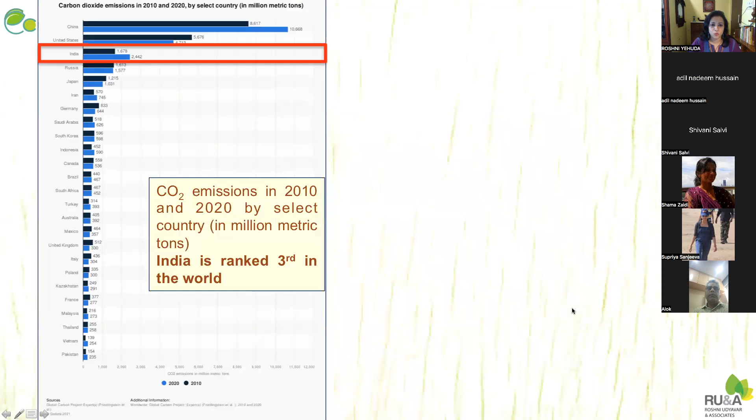So to begin with, why we need green building design. First of all, we are looking at an increased carbon dioxide emission, especially from our country, which is now third in the world in terms of carbon emissions, about 1 to 5 billion metric tons annually.

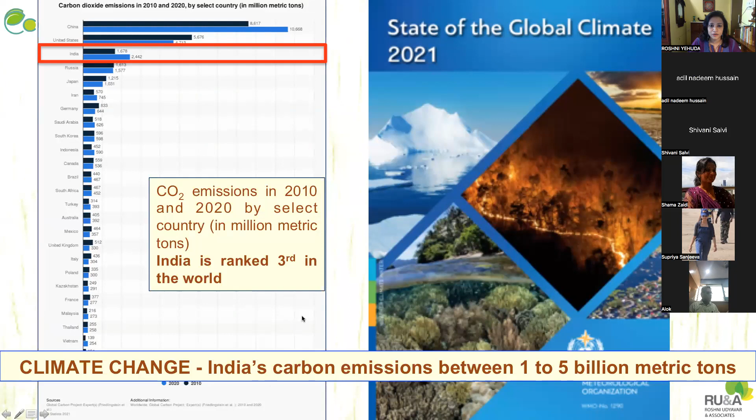And the effects of this are already reported year on year on the state of the global climate by the World Meteorological Organization, which includes a whole range of issues such as extreme weather events, storm surges, sea level rise, sinking of islands, ocean acidification, which is now 26% more than what it was at the time of industrialization, and various other issues, including forest fires and so on. So the effects of increased carbon dioxide emissions are known, and we have seen the effects already happening throughout the world.

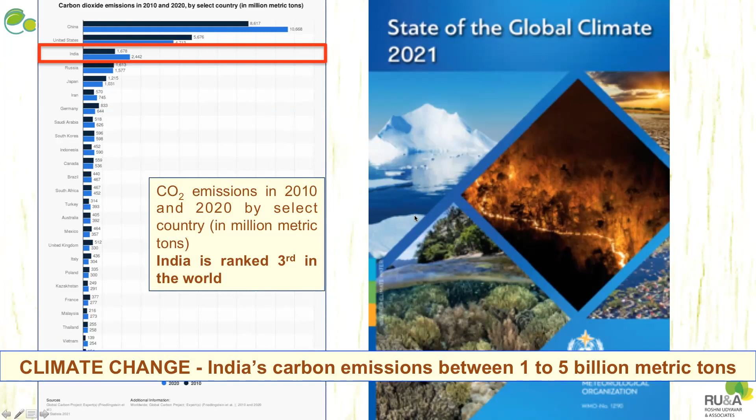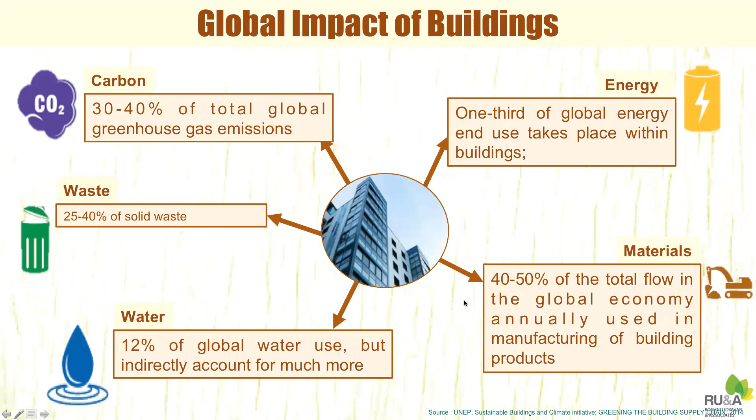When it comes to buildings, what is the role of buildings in these emissions? Almost 40% of the global greenhouse gas emissions is because of buildings. And this includes the energy consumption during the operation and construction of the building, as well as materials that are used. And buildings use water. Almost 12% of global water use is on account of buildings, and that does not account for the water used in the construction or the preparation of the raw materials for buildings, and the solid waste as well that is generated from buildings.

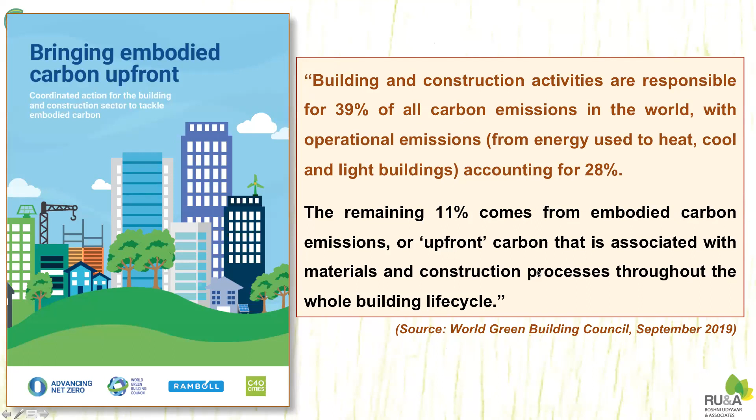Worldwide, the World Green Building Council statistics say that 39% of all carbon emissions in the world are on account of building and construction activities. Of this, 28% alone is on account of heating, cooling, and lighting of buildings. And 11% comes from embodied carbon emissions or upfront carbon, that is in the making of the buildings themselves. So in summary, the built environment is only next to agriculture in its impact on the Earth's ecosystems.

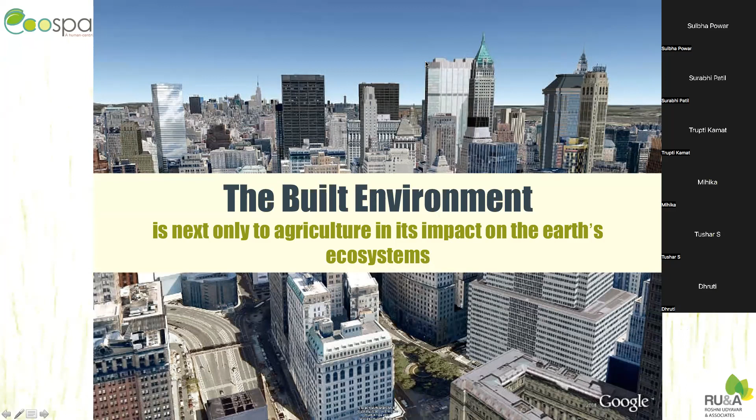So at Roshni Udyavar and Associates and at EcoSpaces, we believe in a human-centric approach to design, which is not just the use of local building materials, reused and recyclable materials, providing visual and thermal comfort to occupants, and making as eco-friendly a building as possible. That is the approach that we have.

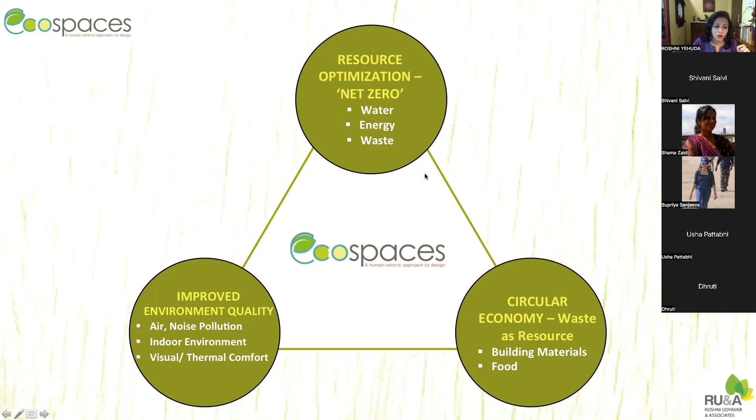And there are three cornerstones to this: resource optimization, that is net zero water, energy, and waste. Circular economy, that is using waste as a resource, so using materials which are reused or recycled or can be reused. And focus on the environment quality, with both indoor as well as outdoor environment quality for the occupants.

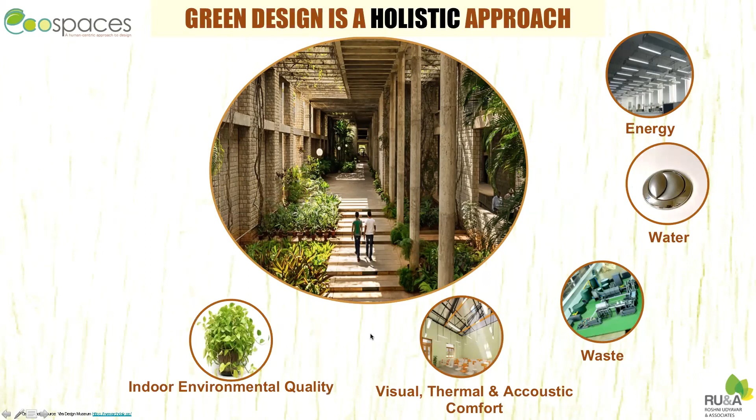So the components of green building design include energy, water, waste, visual, thermal and acoustic comfort, indoor environment quality, vegetation and biodiversity enhancement, and reducing the overall carbon footprint of the building and its occupants. Let's go through each one of them one by one.

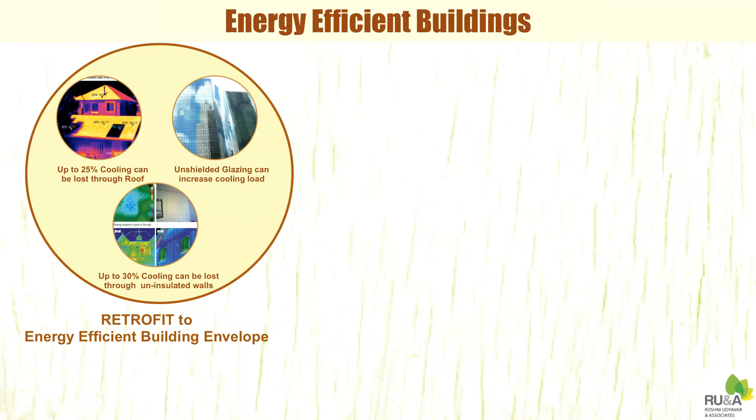The first one is energy efficient building, which is the first component of green building design. This involves design of the building envelope in such a way that the building walls, building roof, glazing, all are energy efficient and providing thermal comfort. So this is the first step for making a building energy efficient. The second is use of efficient equipment. And the last is to additionally add renewable energy, which will make the building nearly zero energy.

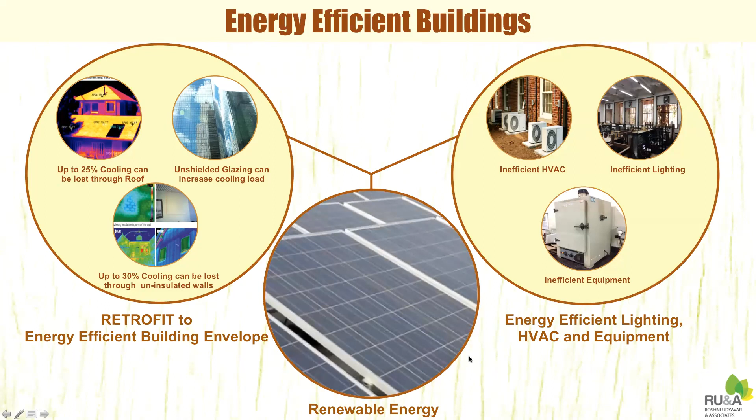So these are the three components that go into energy efficient design. To elaborate a little on what building envelope design is, we analyze the building with respect to its orientation, the site, the form, the materials used on the envelope, and what is the best possible solution. This is an example of a building in Mumbai.

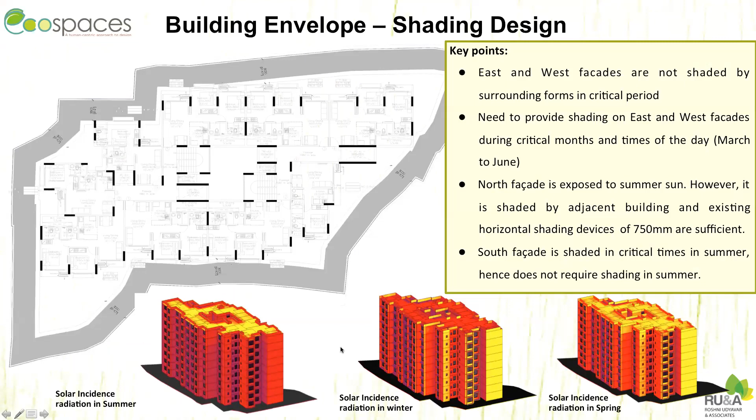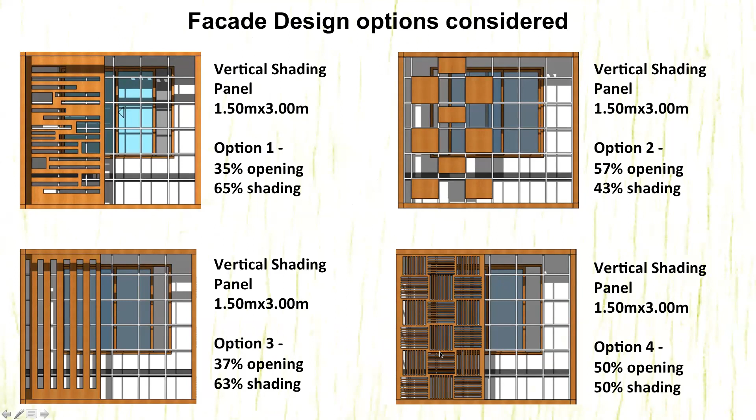And then we came up with various designs for the facade, the eastern facade specifically, in terms of the shading, maximum shading during summer. You can see that there are various options that we came up with, and in terms of aesthetics as well as the material used, we had given various options. So this is an output of how the building can be designed with respect to both climate as well as energy efficiency.

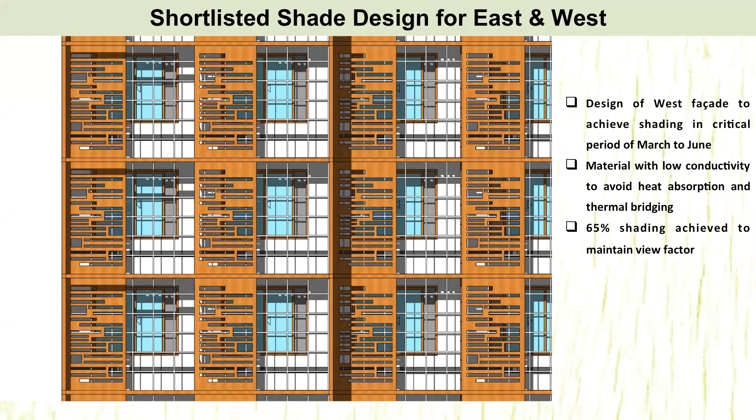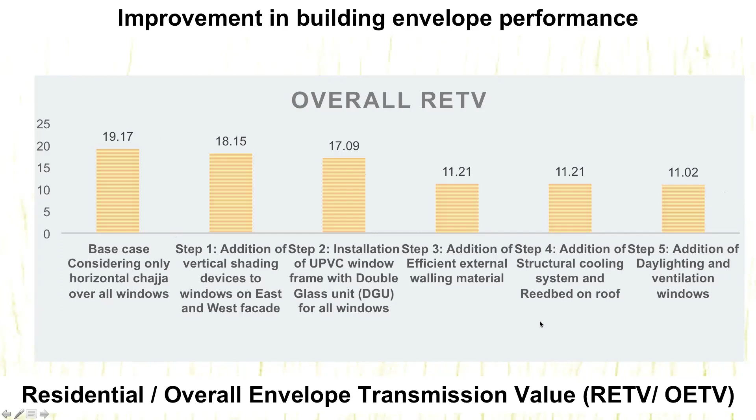Also in envelope design, there is something called the overall or residential envelope transmission value, which calculates how the envelope is affecting the energy consumption of the building. So basically you calculate either manually or using simulation, and you can see that from the base case of 19.17, by using various methods like high performance windows or external walling materials or cooling systems, and using good daylighting and ventilation, you can reduce the overall energy transmission value and make the building more efficient.

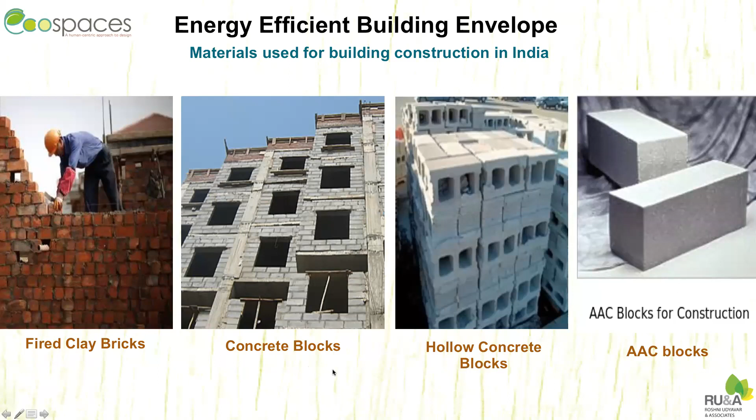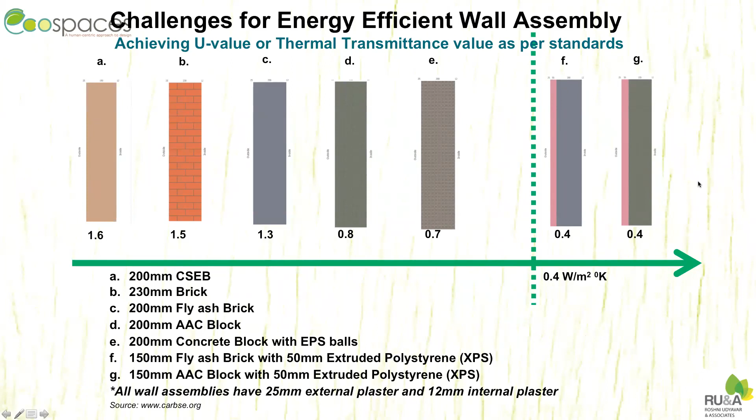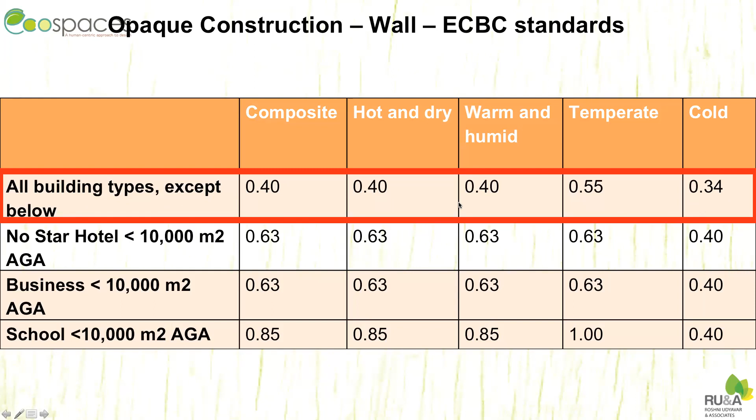But only when you use something like an insulation material are you able to achieve the standards that are given, for example, under the ECBC. So in order to make your building efficient, you need to do various things, and this is part of building envelope design. This shows the standard. You can see 0.4 for all building types under the Energy Conservation Building Code. 0.4 is the standard transmission value for buildings' external walls.

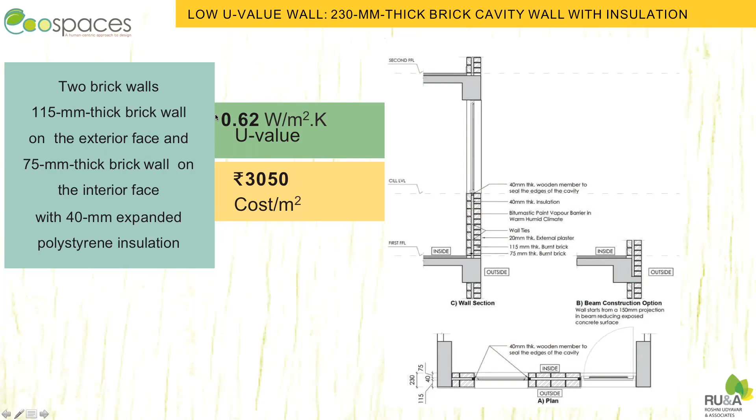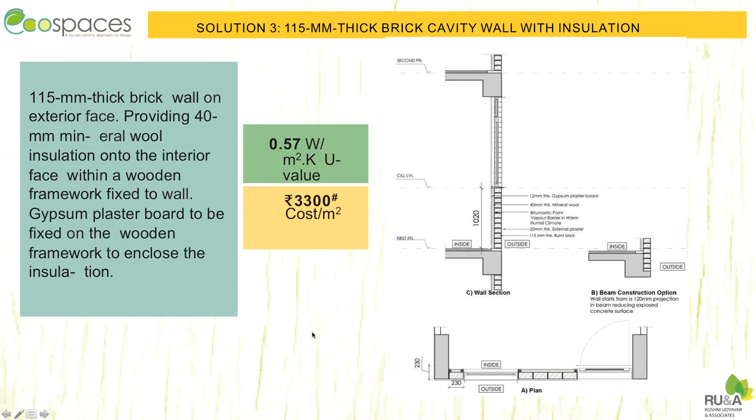And here you can see what combinations are possible. In the earlier case, you saw that the efficient material is something like AAC with insulation. However, you can also have a 115 mm thick brick wall along with a 75 mm thick brick wall and insulation, and get a comparatively good U value, and the cost is also much less. So these are the various options that can be worked out depending upon the site and the material availability. Similar to that is also the roof.

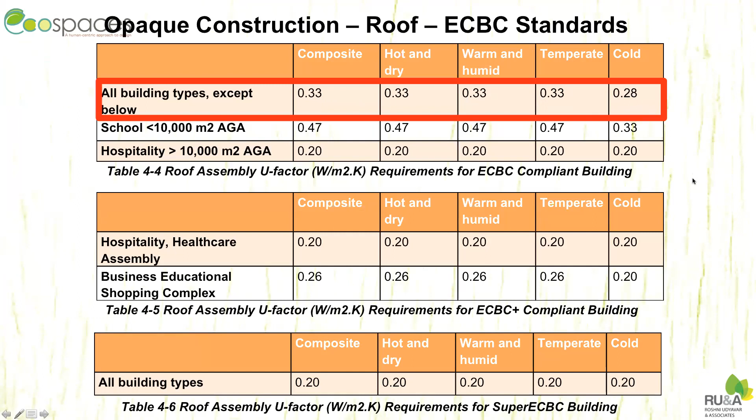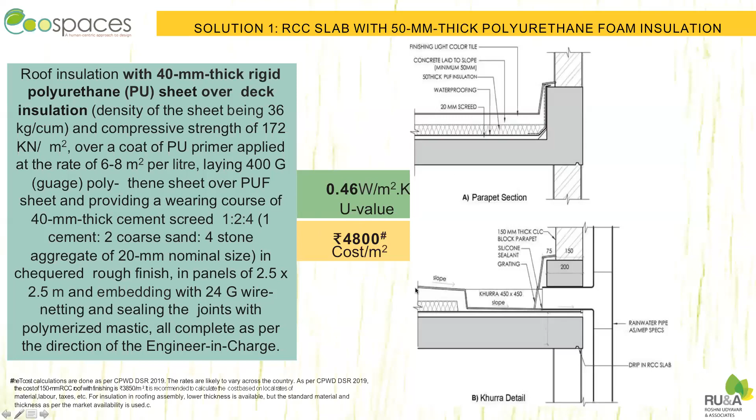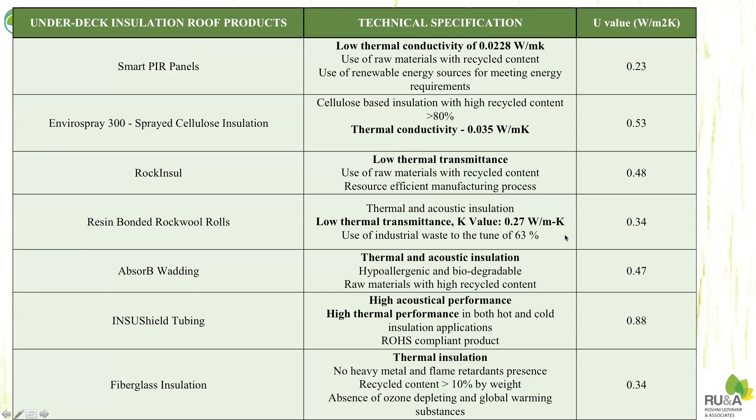So you can see 0.33 is approximately the U value for roof that is required under the Energy Conservation Building Code. This is not 0.33, but even here an insulation has been used, and this is the kind of value we can achieve. And various other things can also be done. Here you can see a list of various types of underdeck insulation products and their comparative U values, and some of them are able to achieve the U values required as per the standards.

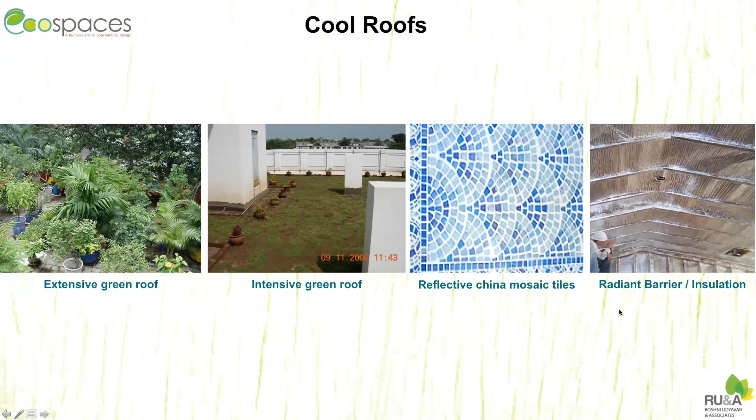Also, one can go for an extensive or an intensive green roof, or use high albedo materials like China mosaic tiles or SRI tiles, and underdeck insulation, or even a radiant barrier such as what is shown over here. Or you can have other combinations, other design inputs like filler slabs or funicular roofs, and so on.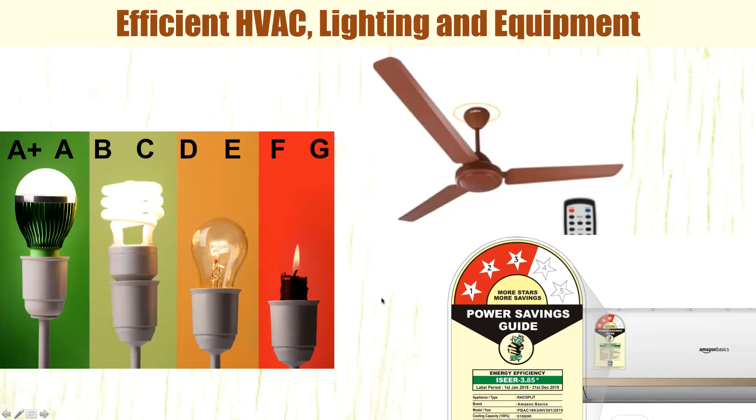The next component of energy efficient design is efficient equipment, which is not very difficult, but what kind of spaces should have what kind of lighting, what should be the lighting power density, and what kind of equipment and HVAC design should be used is also something that is required in green building design.

Here's an example, the energy performance index. It's an index which gives you a benchmark for the energy performance of a building. And here, this is for a 1 BHK apartment. You can see that by using various efficient equipment such as geysers or air conditioners or ceiling fans, slowly from 2014 to 2018, the EPI has come down.

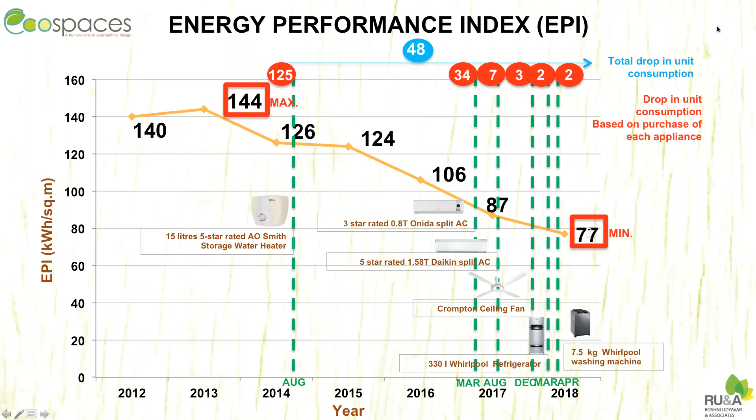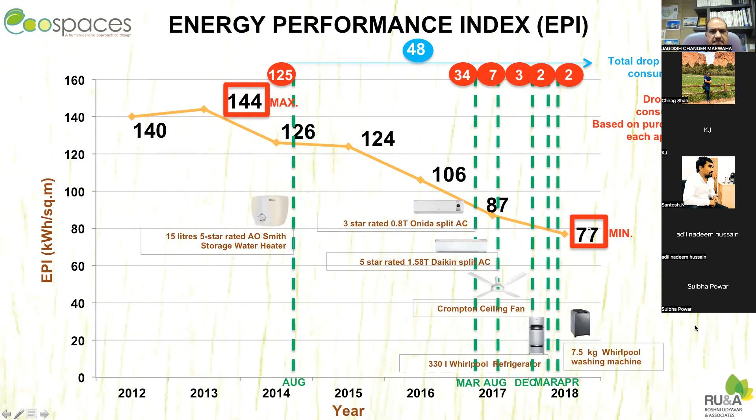The next step is making the building a nearly zero energy building. So once you have done the envelope and the equipment, then you can have renewable energy in the form of solar panels or wind energy or bioenergy or biomass. And you can further reduce the energy consumption of the building by using a decentralized renewable energy source within or near the site.

An example of that is the Paryavaran Bhavan in New Delhi, which is not only one of India's first net zero energy buildings, but it's a net positive building, which means that it gives more energy to the grid than is actually required by the building. And this is on account of the very good design in terms of daylighting, as well as the huge number of solar panels, about 930 kilowatt peak, that have been put onto the roof of this building, which takes care of its energy requirements.

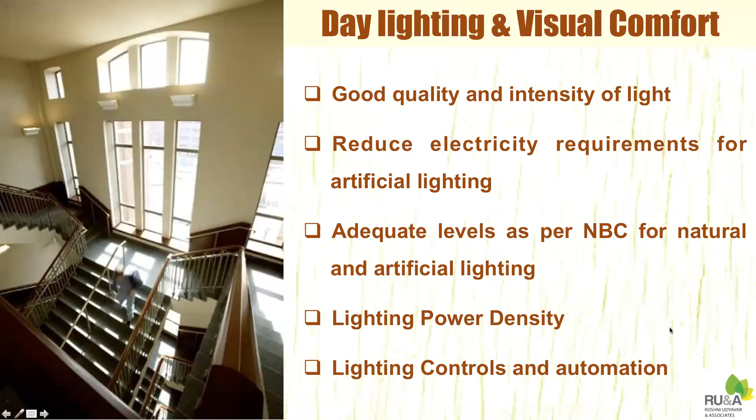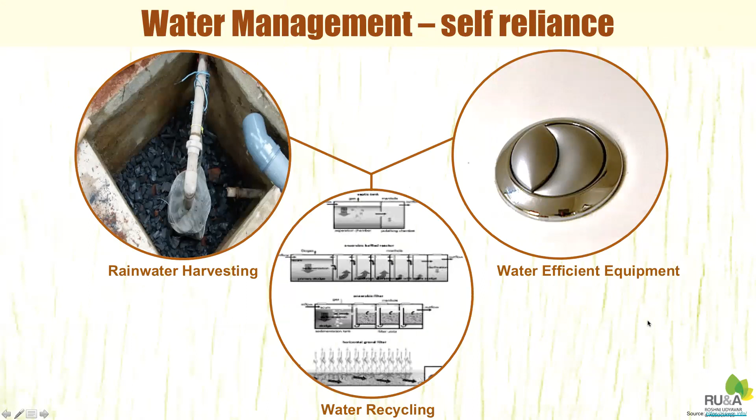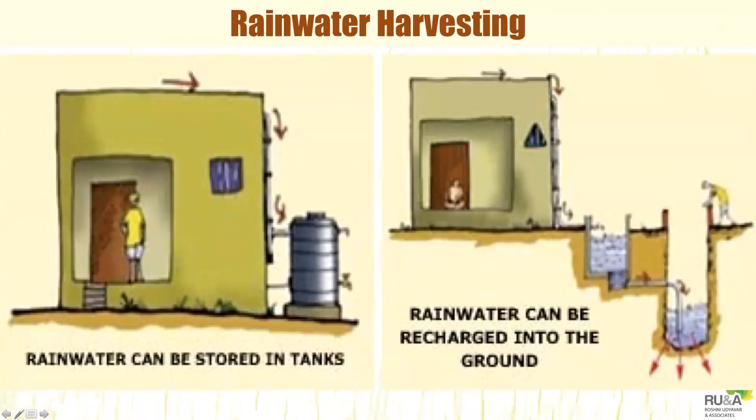In addition to that, providing good daylighting, that is visual comfort, is also part of green building design. The next thing is water management, which involves 3 steps, that is harvesting the rainwater on the site, using water efficient equipment, and wastewater treatment. In rainwater harvesting, of course, you can do 2 things. One is storage of the rainwater, or you can put the rainwater in the ground by groundwater recharge, if that is permissible in that specific area.

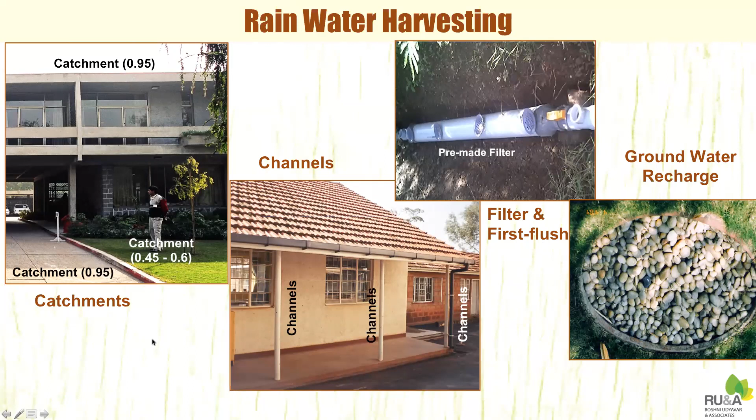This involves identifying the catchments, because each catchment has a different runoff potential, identifying what kind of channels can be used, the filters and the first flush device, and finally the groundwater recharge technique, whether it is a trench, a pit, a deep recharge system, or something like that. So every site has a potential for rainwater harvesting. The idea is to use it as much as possible so that there is a minimum amount of runoff from the site, and most of the water goes either down or is used on the site itself. Here are some of the case studies in and around Mumbai that we have done in the past.

Water efficient equipment is the second part of water management, which includes using water efficient equipment such as flow restrictors, pressure reducing valves, low flow rates, sensor based faucets, dual flush systems, using water meters to monitor the usage, and drip irrigation, sprinklers, and so on for the landscape.

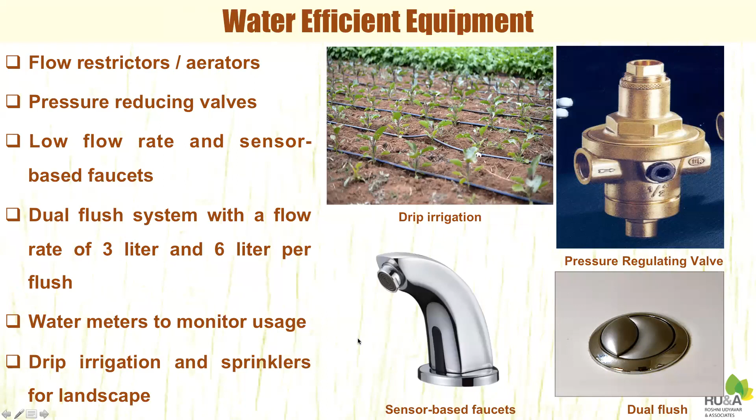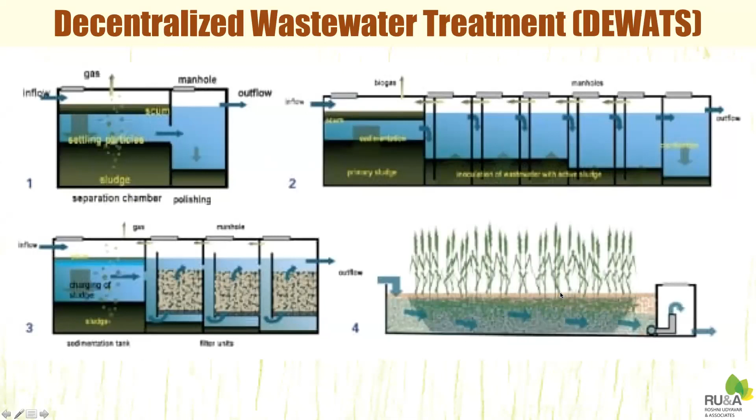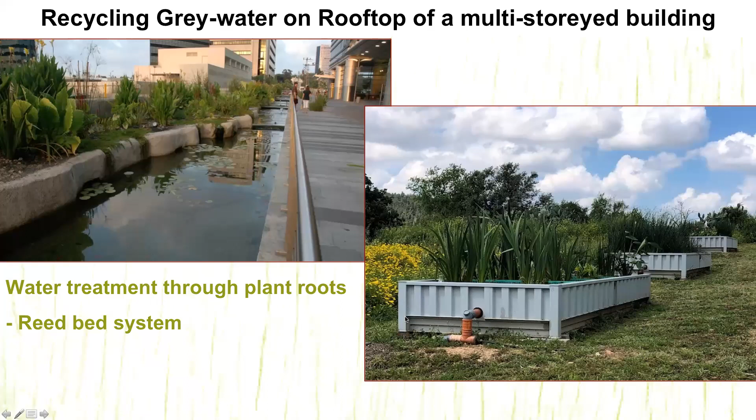Lastly, if you have the space and if you can afford the cost, you can also do decentralized wastewater treatment. We recommend systems which do not use energy and which use plants, and by the reed bed system or the roots themselves, they are able to aerate and treat the water. So this kind of system is more advisable. There are various types of these systems, and there are even modular systems now available which you can install if there is space within your site.

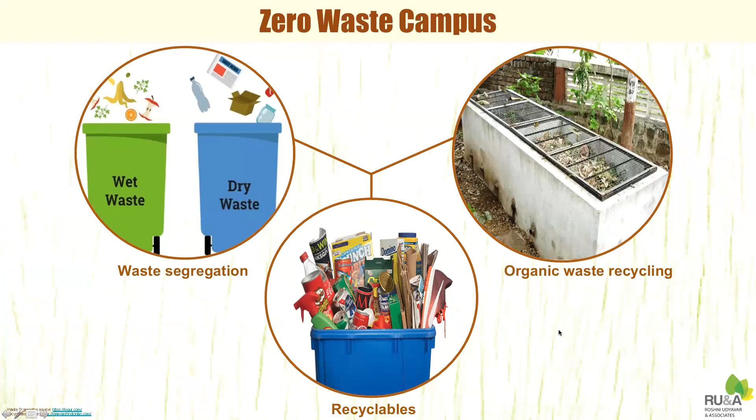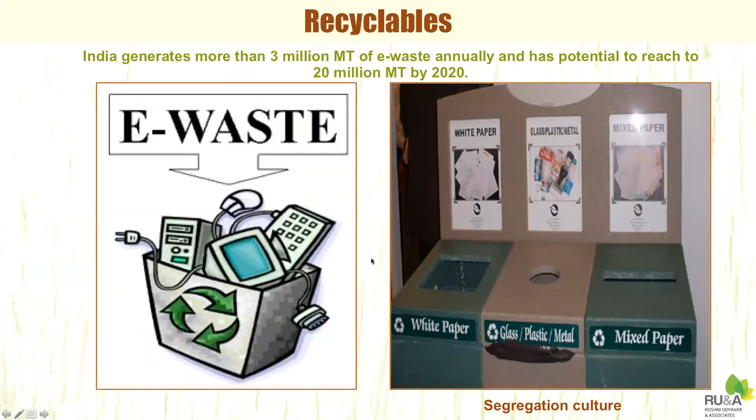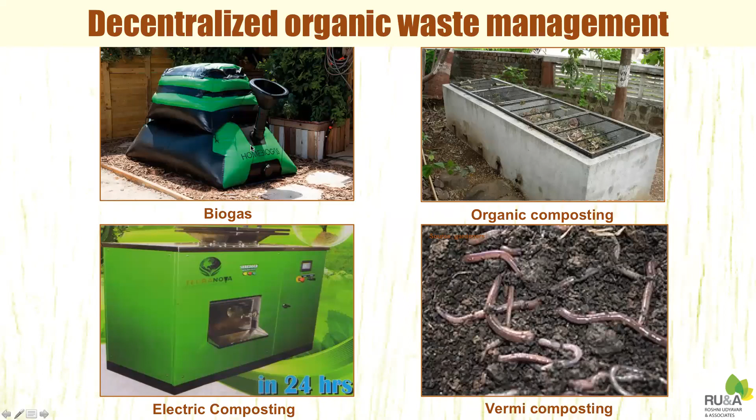The next thing is looking at solid waste. So how we can segregate waste, treat the organic waste on site and give the rest of the recyclables for recycling in some way or the other. So having the segregation, even including e-waste, how it can be treated, or you can have a tie-up with a local company in order to reduce the e-waste. And what kind of system is most appropriate for your site, whether it is biogas or vermicompost, an organic composting system, and so on.

Lastly, we look at indoor environment quality. So you can see that there are various things involved in improving the indoor environment quality, that is removing harmful chemicals, having good ventilation, and plants are one of the ways by which you can do it as well. There are various other techniques, but it basically involves providing good visual and thermal comfort to the occupant.

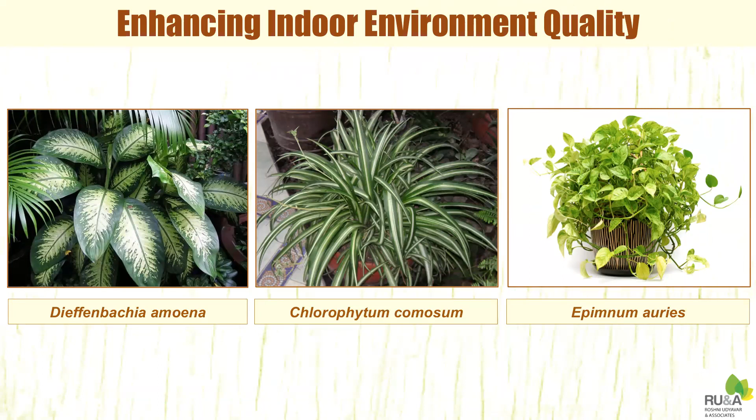Carbon footprint reduction, meaning, for example, if during the construction process you have to remove trees, how to have additional tree plantation there, or how you can transplant the existing trees back onto the site post construction, or you can even have a tree plantation at another place, which is called afforestation. So there are various ways by which you can reduce your carbon footprint. Even the mode of transport: if it's a college or an institution, you can have an electric transportation system, or a cycling system or something like that.

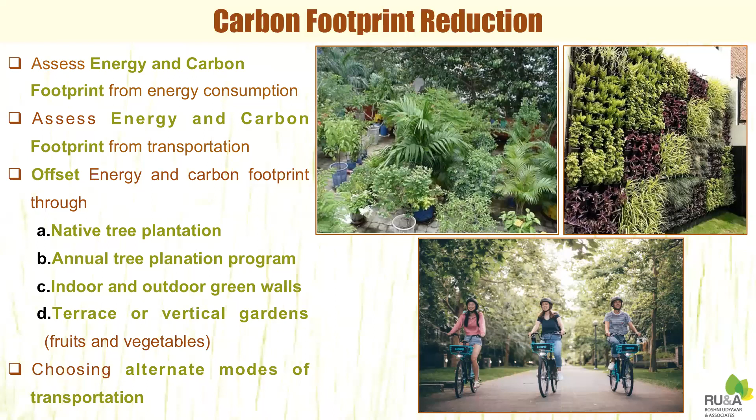Increasing the vegetation and biodiversity. This can be done even in small spaces by having the right mix of various kinds of plants, which also attract various types of fauna and insects, and make the ecology more holistic.

So that's it from me, and now I would hand over to Shivani to start the next part of the presentation, which is on green building certification. So over to you, Shivani.

Is the screen visible? Yes, yes. You can put it on. Yes, thanks.

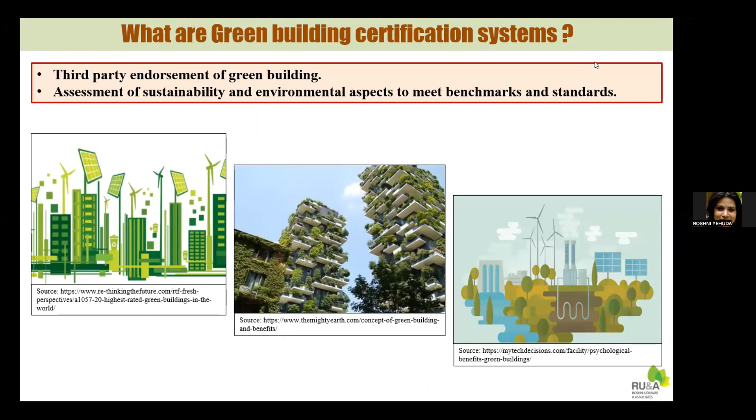The green building certification systems are IGBC. IGBC is Indian Green Building Council. The organization is Confederation of Indian Industry, which is CII IGBC. The type of rating is green new buildings, and the point system is till platinum.

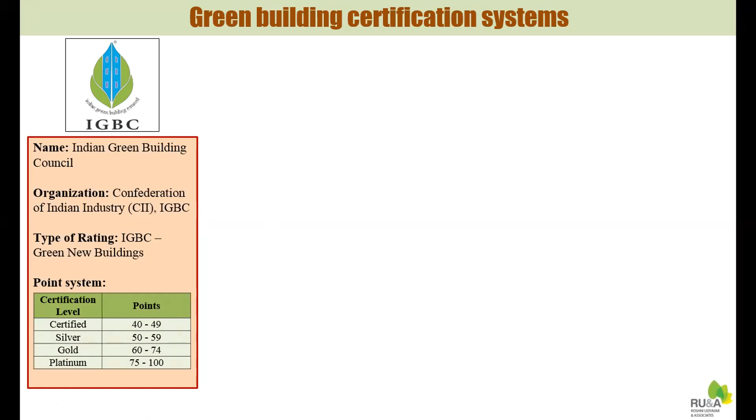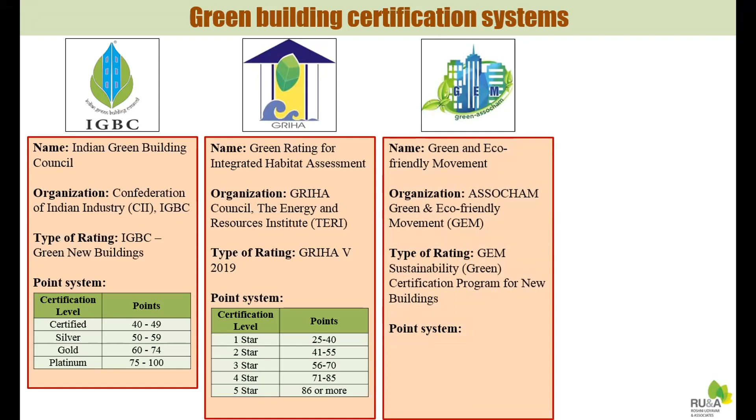GRIHA is a green rating for integrated habitat assessment. The organization is GRIHA Council, and TERI, which is the Energy and Resources Institute. The type of rating is GRIHA version 2019. And the point system is 1 to 5 star. GEM is a green and eco-friendly movement, and the organization is ASSOCHAM GEM. The type of rating is GEM Sustainability Green Certification Program for new building. And the point system is again from 1 to 5.

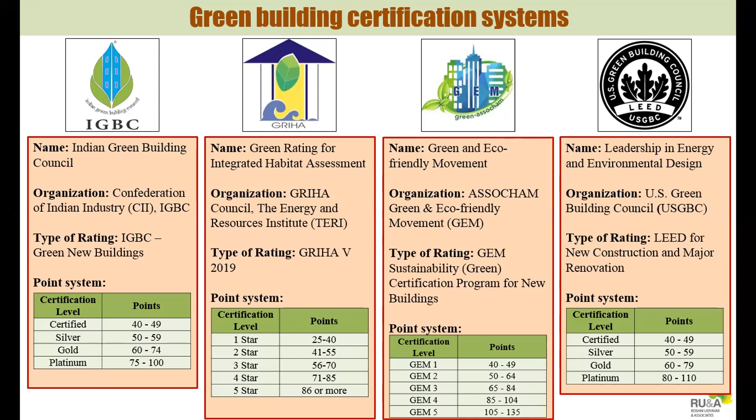LEED is leadership in energy and environmental design. The organization is USGBC, that is the US Green Building Council. And the type of building is new construction and major renovation. The point system is up till platinum. These are the various common certification systems which are basically used in India.

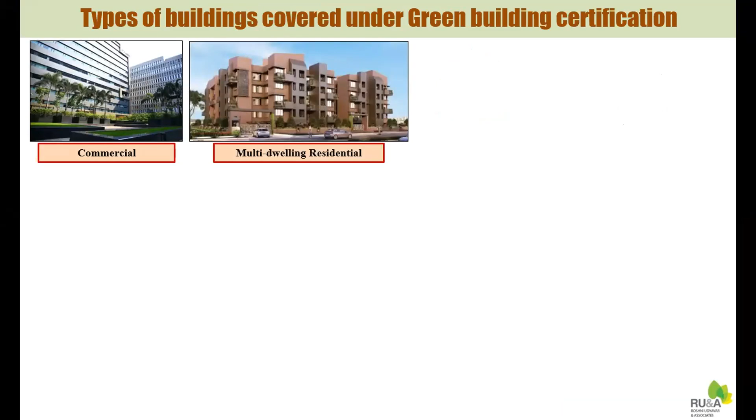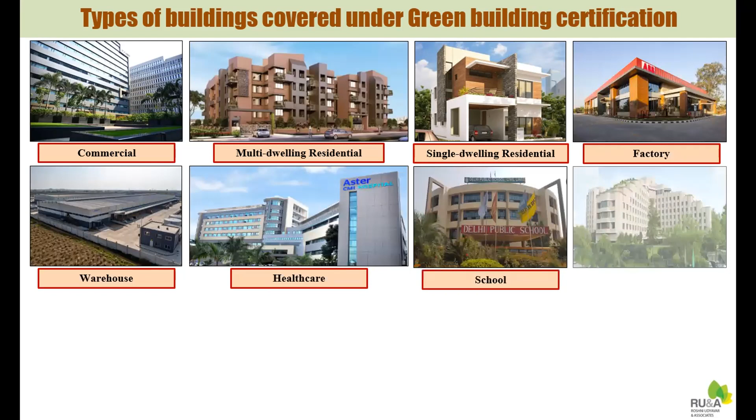The types of buildings that are covered under green building certification are, we'll be looking at some of the major categories. All the major categories are covered under the various green building certification systems. So we start with commercial, multi-dwelling residential, single dwelling residential, factory, warehouses, healthcare, schools, hotels, shopping malls, and green interiors for commercial as well as residential.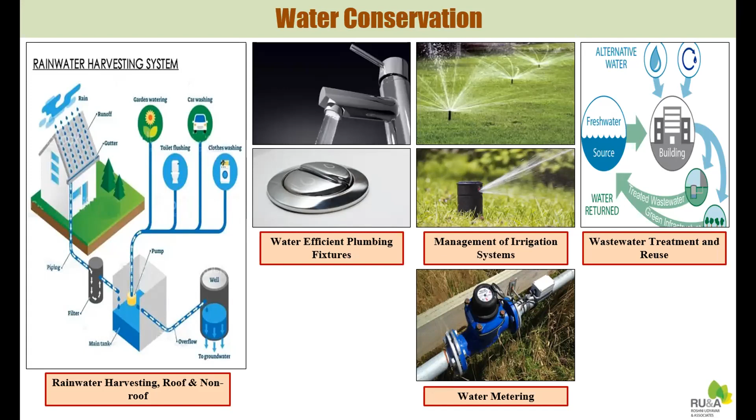Under energy efficiency, some of the credits have been mentioned here. So having R32 refrigerants for HVAC and the air conditioning systems, using solar PV, solar thermal and wind energy, on-site and off-site, having LED lighting fixtures, which are energy efficient, and energy efficient air conditioning systems, BEE rated, 3 to 5-star rated.

You also have to carry out a whole building simulation to understand the building performance, the building envelope performance, and the energy performance. So an energy simulation has to be carried out, which is a major part of this credit. And again, energy metering for the various energy use applications, and a building management system.

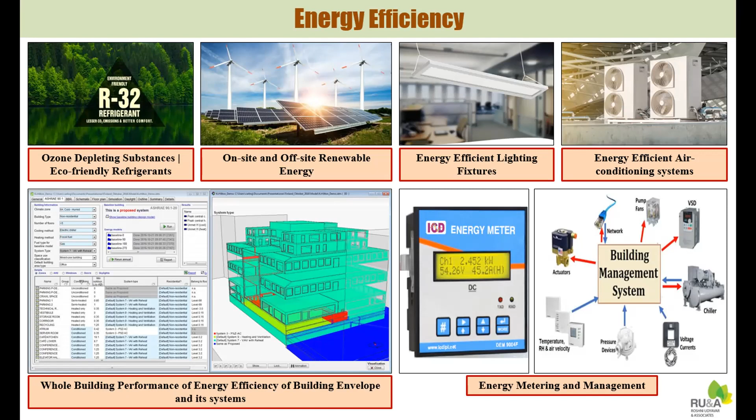Under building materials and resources, some of the credits are mentioned over here. Segregation of dry, wet, organic waste, e-waste, etc. Followed by organic waste management: a provision for an organic waste management system has to be made. Under reuse of salvaged materials, you use the old building materials. So if a building has been brought down, you use some of those materials like the windows, doors, etc. And materials with recycled content include fly ash bricks, recycled concrete blocks, etc.

Local materials are those locally available near the site within around a 400 kilometer radius. Rapidly renewable materials include bamboo and bagasse. And wood-based materials are FSC and PEFC rated wood. Those are to be used. And handling of construction waste is segregating the concrete, bricks, plastic, wood, metal, glass, paint containers, etc. All that waste has to be segregated and reused.

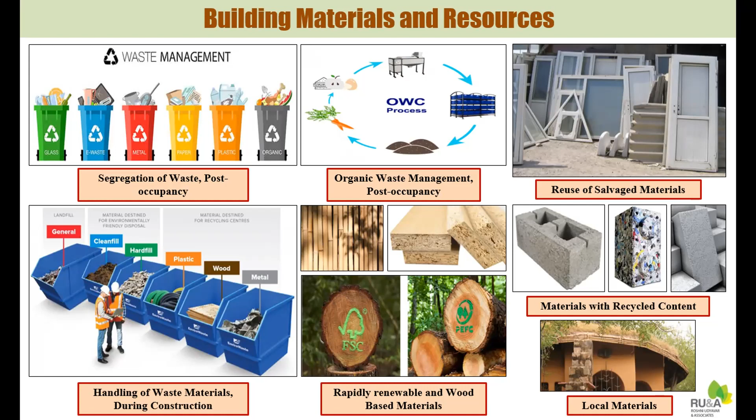Under environmental quality, we have the CO2 monitoring. So CO2 sensors and the monitoring has to be done. Under minimizing indoor and outdoor pollutants, we have the metallic entryway systems to reduce the dust particles from entering the structure. And we have MERV 13 filters for the air conditioning systems, and germicidal UV lamps again for the air conditioning systems.

And then we have low emitting materials, which are paints and adhesives which have a low or zero VOC content. And the carpets should be CRI Green Label Plus rated. And WPC is a wood polymer composite. So these can be used for paneling and for interior use basically.

The indoor air quality management is basically keeping the areas clean and covering the ducts during construction. You cover the ducts so that there's no dust inside, and there are many other criteria also. I've just mentioned two here. And indoor air quality testing is after construction and before occupancy. There is an indoor air quality testing that has to be carried out.

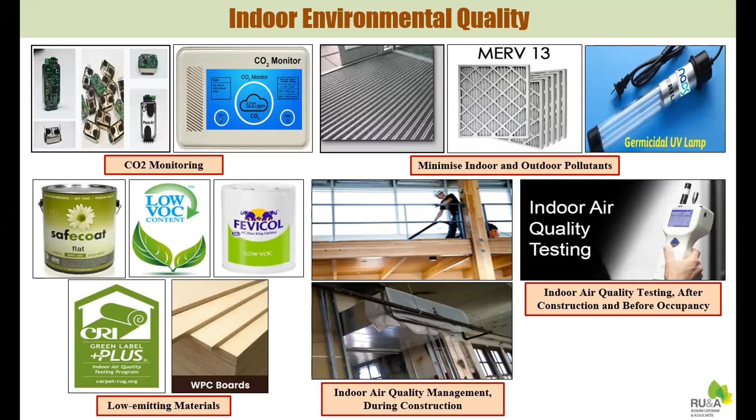Yes, now we'll move on to a tentative process of green building certification, how you go about it. You start with the type of project. So you basically know that first, and then which category, like healthcare, residential, new building, it falls under, followed by the registration procedure, which would take around 6 to 7 days, followed by the green building certification preliminary assessment and green building documentation. That would depend on the stage of the project, so accordingly, the time it would take.

And here what we see is the submission of preliminary documentation for review. It would be reviewed by third-party assessors, which would take around 30 days. After that, there is the final submission and then a site visit. And then you get the final review and award of rating, which would take another 30 days. So this is basically a tentative timeline and process for green building certification.

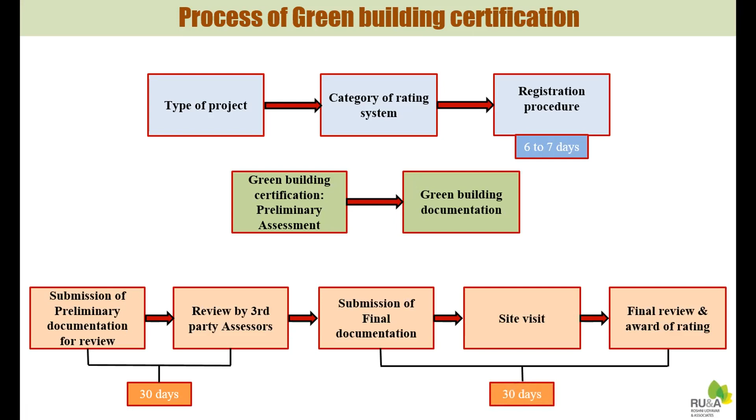The tangible benefits of green building are represented in a graphical format here. Energy savings are in the range of 42%, which would be achieved by having an efficient envelope system, efficient materials, and efficient equipment and appliances. The waste reduction is around 33%, by having an effective waste management plan executed on the site. And water savings is around 25%, which could be achieved by installing water efficient plumbing fixtures and reusing and recycling the waste water which is generated.

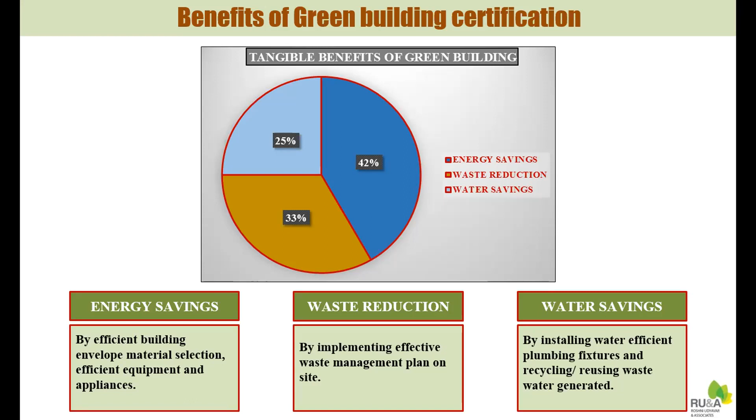The cost of green building is around 8 to 10% more than that of a conventional building. The parameters by which the cost would increase are renewable energy such as solar PV, thermal and wind; passive design, which would be minimum if it is taken into consideration during the design stage itself; wastewater treatment system; energy efficient equipment; and solid waste management system.

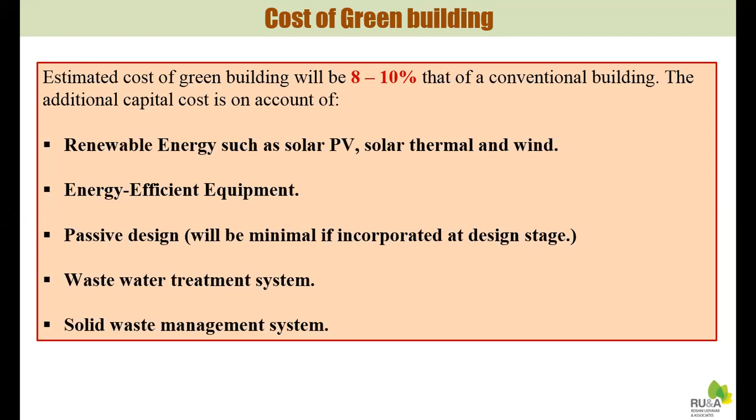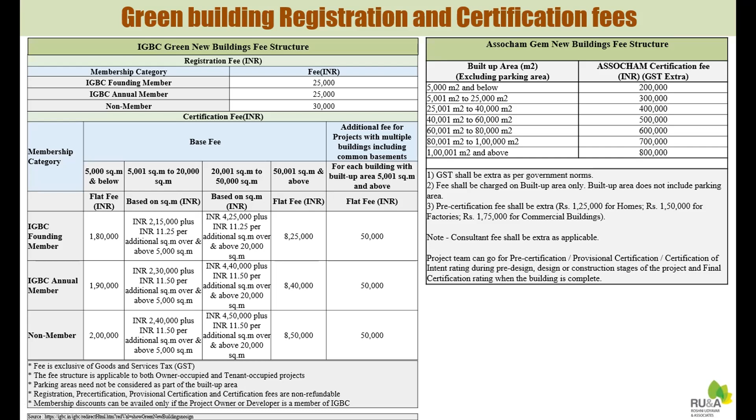Here we can see the registration and certification fees in these two tables. The first one is for IGBC green new buildings, the registration and the certification fees. And the second one is for ASSOCHAM new buildings. These would differ as per the rating system and the type of building, and mainly as per the areas. And also they are exclusive of GST, so that would be additional.

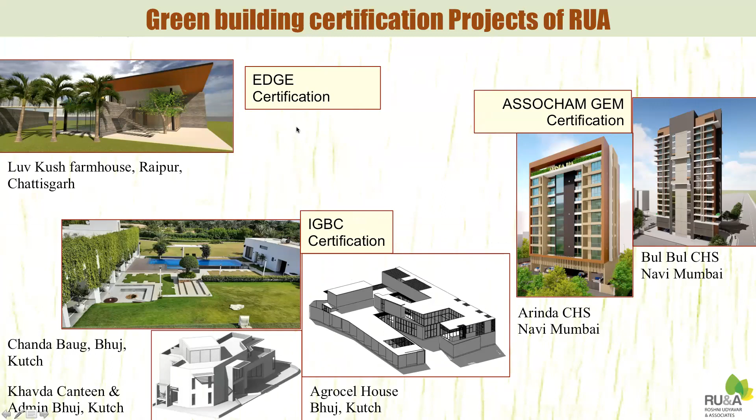These are the projects that we are doing in different parts. You can see ASSOCHAM GEM projects we are doing mainly in Navi Mumbai, IGBC certification projects also, and EDGE certification, which we didn't share much with you because it's not very popular, but it's also a World Bank based rating system. So as I said, there are many rating systems. We look at a whole offering, which is green building design, certification, and also the certification documentation. Certification also requires a lot of guidance and coordination with all the consultants working on the project. So that is also part of what we do.

Our team is a multidisciplinary team of architects, planners, academicians, ecologists, botanists, engineers, energy specialists, and technical consultants. These are the various areas that we work in: architectural, interior, energy efficiency, even environmental aspects like watershed. We do capacity building and training. We have some upcoming live offline seminars, which we will share with you. And our credentials: we have been in this field for about 20 years. We have various empaneled people in our team, including accredited professionals from IGBC, LEED, ASSOCHAM. We have people on board doing energy simulation and building envelope analysis.

Some of the questions that came through mails, I just want to quickly address. Adil, you had asked about some rural technology interventions. I was not very sure, because most of the certifications happen in urban areas. Rural buildings we consider are already quite sustainable. However, with rural technologies, you can definitely have something for wastewater treatment, and even the sustainable building materials which are already there. So we are now going for composite walling systems like the ones already used in rural areas, just making them a little bit more user friendly. So there are various technologies, even biogas, use of biomass, and various other things.